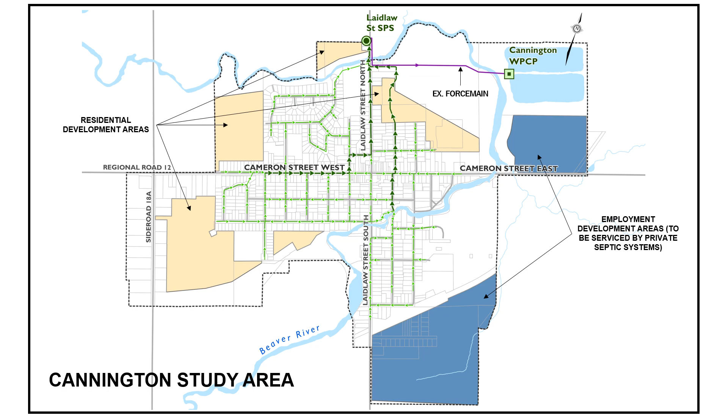Preliminary estimates for Cannington indicate that the service population within the existing urban boundaries could potentially reach approximately 5,400 by 2041, approximately 3 times the existing serviced population.

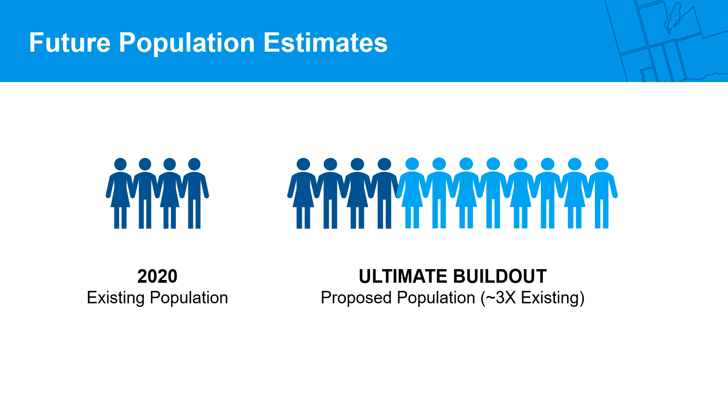Based on historical average day flows from 2018 to 2021, the Cannington Water Pollution Control Plant, or WPCP for short, is operating at capacity. It is standard practice for municipalities in Ontario to start planning for upgrades when a treatment plant reaches between 75 and 80% of its rated capacity and additional growth is projected.

To accommodate the projected growth in the community, a wastewater treatment capacity of 2,500 cubic meters per day would be required. Additional capacity is also required in the sanitary collection system to convey flows to the WPCP.

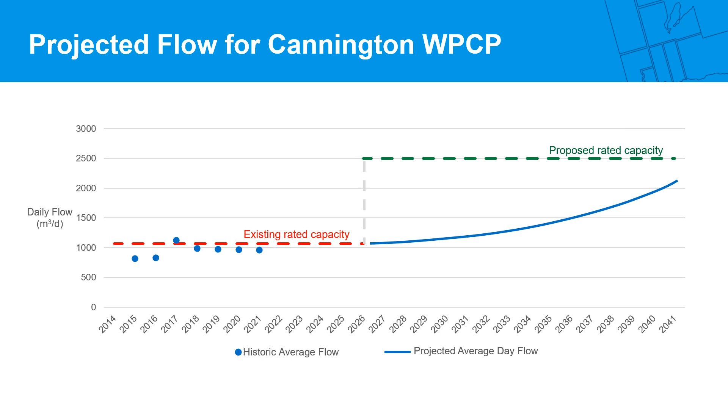Cannington is growing. Infrastructure improvements to the Cannington wastewater system are required to service growth in the community. For this study, we need to answer two questions: 1. How do we convey wastewater flows generated by new growth in the community? And 2. How do we treat those wastewater flows?

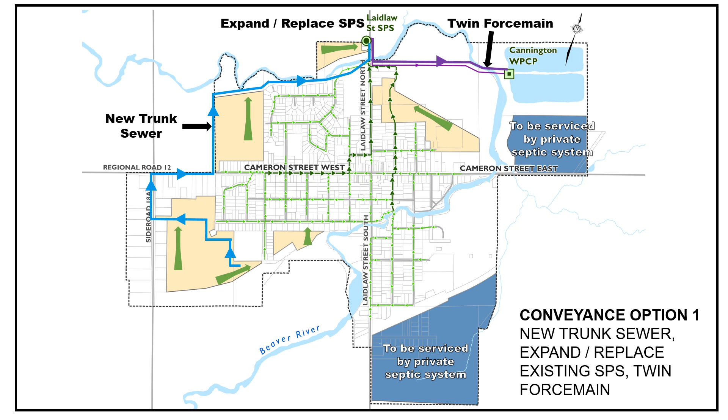So where do we begin? We have three different options to address the first question. The first conveyance option involves constructing a new trunk sewer to service new development to the west, expanding or replacing the existing Laidlaw Street sewage pumping station, abbreviated as SPS, and constructing a twin force main to the Cannington WPCP.

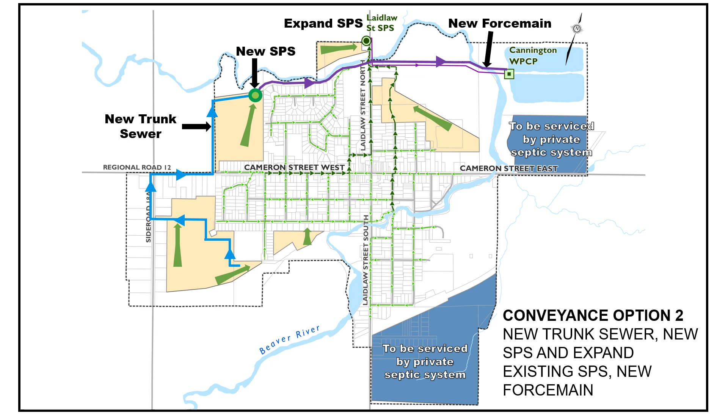The second conveyance option involves constructing a new trunk sewer to service new development to the west, expanding the existing Laidlaw Street SPS, constructing a new sewage pumping station to service new developments to the west, and constructing a new force main to the Cannington WPCP.

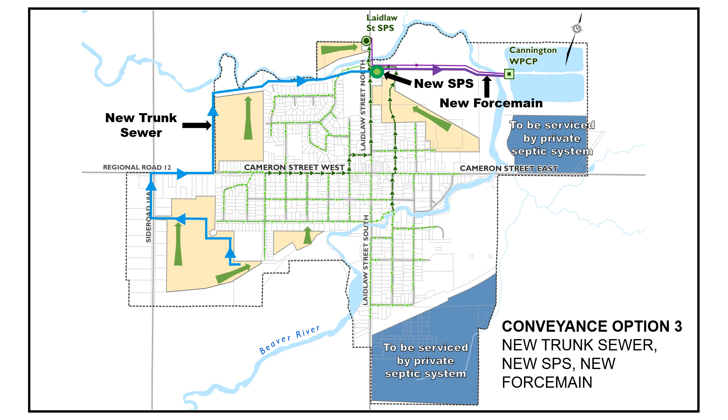The third conveyance option involves constructing a new trunk sewer to service new development to the west, constructing a new sewage pumping station and diverting flows from the existing and proposed development to it, and constructing a new force main to the Cannington WPCP and reusing the existing force main. The Laidlaw Street SPS could be maintained in service or eventually decommissioned.

There are still questions left to address. As part of the next steps for this study, we need to: 1. Evaluate the conveyance options to identify the preferred solution. 2. Identify the preferred site or sites for the pumping station or pumping stations and confirm the preferred alignment of sewers and force mains.

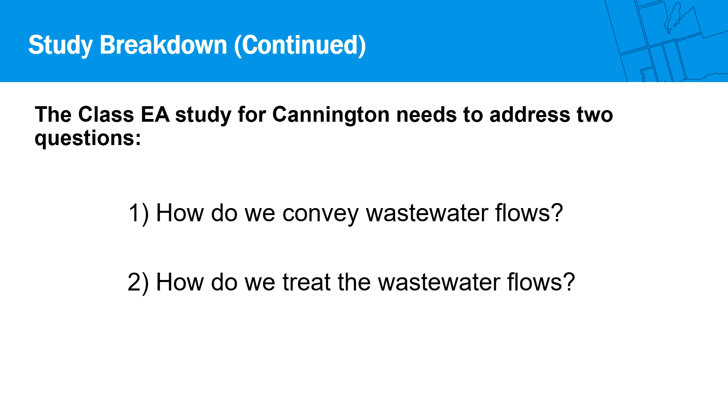To select the preferred treatment option, we need to consider a few criteria. 1. Does the option allow meeting the long-term capacity needs? 2. Does the option allow the treated discharge to consistently meet effluent quality objectives and discharge policies? 3. Does the option efficiently use existing infrastructure? 4. Is this option compatible with existing treatment processes and operational practices, such that implementation will not significantly impact existing operations? And 5. Can the servicing strategy be implemented without major disruption to current sanitary sewage servicing?

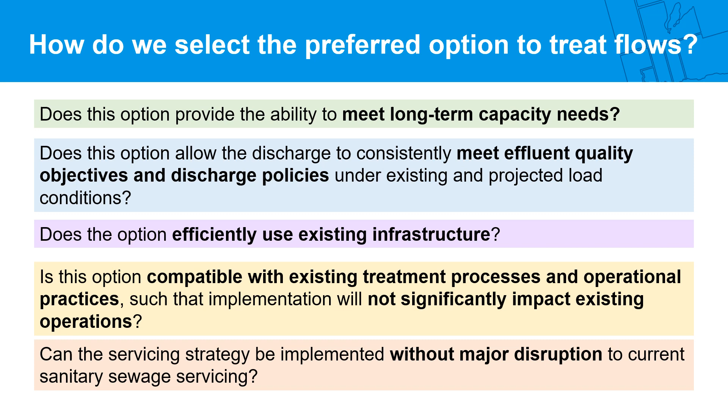If the answer to any of these questions is no, then the alternative is considered inadequate and is eliminated.

Treatment option 1 involves constructing a new treatment plant to operate concurrently with the existing Cannington WPCP. All new development would be directed to the new plant, while the existing development would continue to be directed to the existing plant. This option would meet long-term capacity needs. It would allow consistently meeting effluent quality objectives. It could be implemented without major disruption to the current sanitary sewage servicing. However, it does not efficiently use existing infrastructure and is not compatible with existing treatment processes and operational practices.

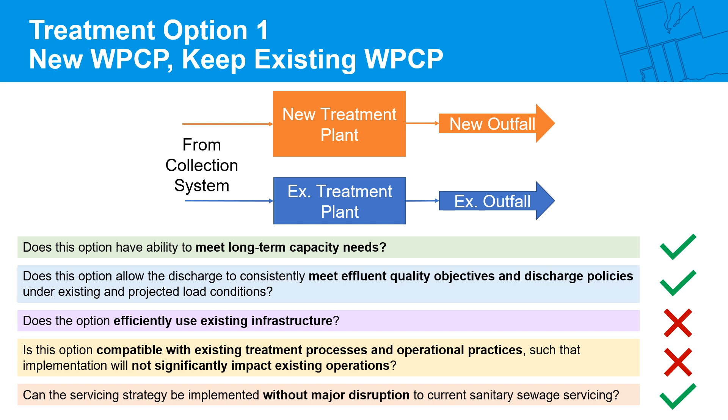Treatment option 2 involves constructing a new treatment plant and decommissioning the existing Cannington WPCP. This option meets long-term capacity needs. It allows meeting effluent quality objectives consistently and can be implemented without major disruption to the current sanitary sewage servicing. However, it does not efficiently use existing infrastructure and is not compatible with existing treatment processes and operational practices.

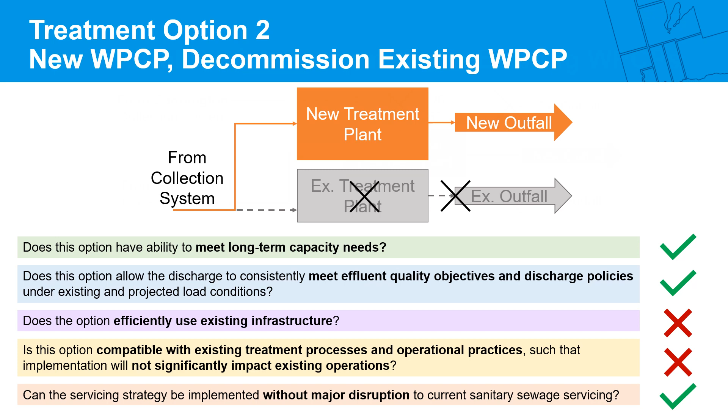Treatment option 3 involves decommissioning both the existing Cannington and Sunderland WPCPs and constructing a new central WPCP to treat wastewater from both communities. Like the previous options, this option meets long-term capacity needs. It allows the discharge to consistently meet effluent quality objectives and can be implemented without major disruption to the current sanitary sewage servicing. But it does not efficiently use existing infrastructure and it is not compatible with existing treatment processes and operational practices.

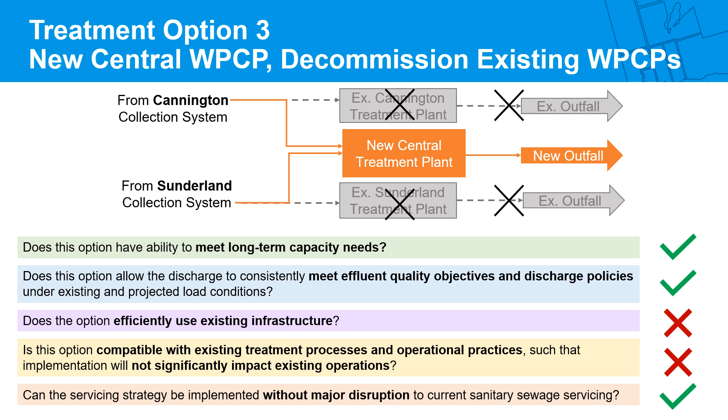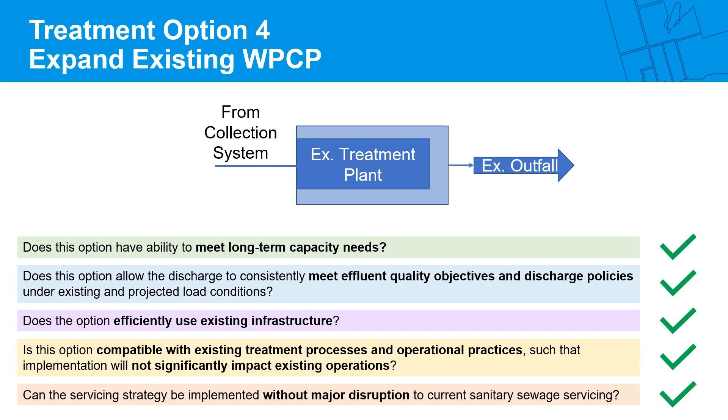Treatment Option 4 involves expanding the existing Cannington WPCP. This option meets long-term capacity needs, consistently meets effluent quality objectives, efficiently uses existing infrastructure and it is compatible with existing treatment processes and operational practices, and it can be implemented without major disruption to the current sanitary sewage servicing.

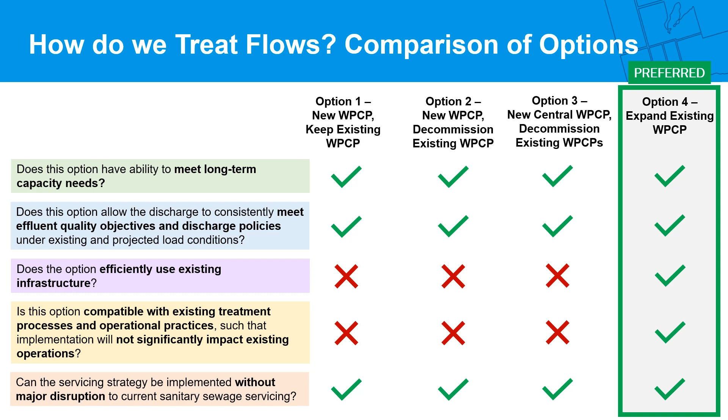In summary, we have 4 treatment options. Options 1, 2, and 3 do not meet 2 of our mandatory criteria. Option 4, expanding the existing Cannington WPCP, is the only one that meets all the criteria. Therefore, this is the preferred option.

There are still questions we need to answer, namely: what are the treatment objectives? What is the preferred approach or strategy to expand the WPCP? What is the preferred treatment technology? And what is the preferred design concept for the WPCP expansion? In the next few slides, we will discuss how we propose to tackle each of these questions.

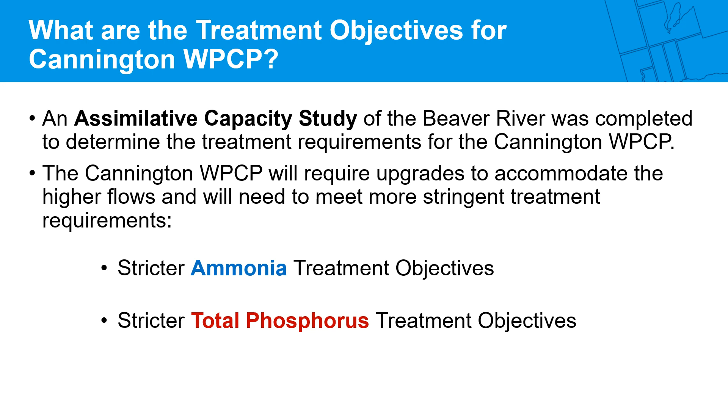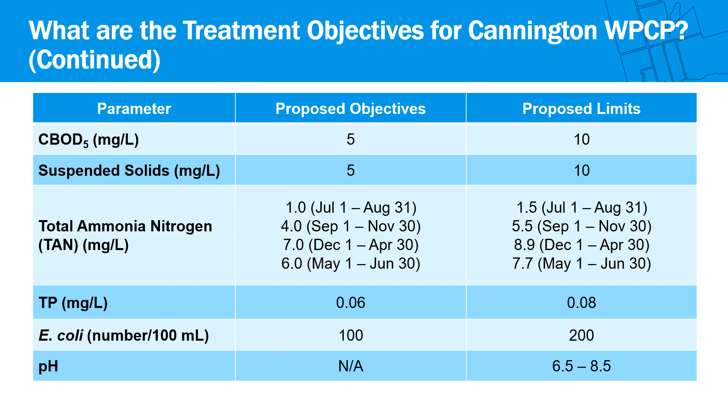What are the treatment objectives for Cannington WPCP expansion? To figure this out, the region completed an assimilative capacity study of the Beaver River, where treated effluent from the WPCP is discharged. To minimize impacts to the river, it was concluded that the Cannington WPCP expansion will need to meet more stringent treatment requirements for ammonia and for total phosphorus. This table shows the treatment objectives and limits proposed for the Cannington WPCP, proposed to minimize impacts to the water quality of the Beaver River.

What are the possible strategies for expanding the WPCP? We could add more facultative lagoons like the existing ones. Facultative lagoons rely on the natural activity of microorganisms to remove pollutants from the wastewater. We could build a new mechanical treatment plant, or we could add mechanical equipment to the existing lagoons. All these options would be designed to meet the treatment objectives, but each has advantages and disadvantages.

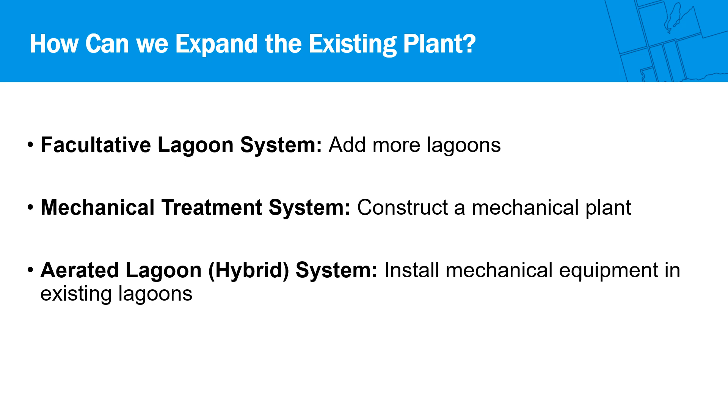Facultative lagoons use a natural, passive treatment process that is simple to operate but requires a large footprint. These lagoons are typically designed to discharge only twice a year, which means that the incoming flows must be stored for up to 6 months. Facultative lagoons are typically found in smaller rural communities.

Mechanical treatment plants use mechanical equipment such as air blowers, pumps and mixers to accelerate biological treatment processes to remove organic matter and solids from the wastewater. These processes require smaller footprint but are more operationally complex. These facilities are typically designed to discharge continuously, eliminating the need for large storage tanks or lagoons. Given their smaller footprint, these plants are used where there are site constraints.

Finally, an aerated lagoon system combines the benefits of a lagoon with those of a mechanical plant. Aerated lagoons do not require as much space as facultative lagoons as they use mechanical equipment to accelerate the rate of treatment. Thus, they are a good option to expand the capacity of existing lagoon plants without the need for new lagoons. Aerated lagoon systems can be found all across southern Ontario.

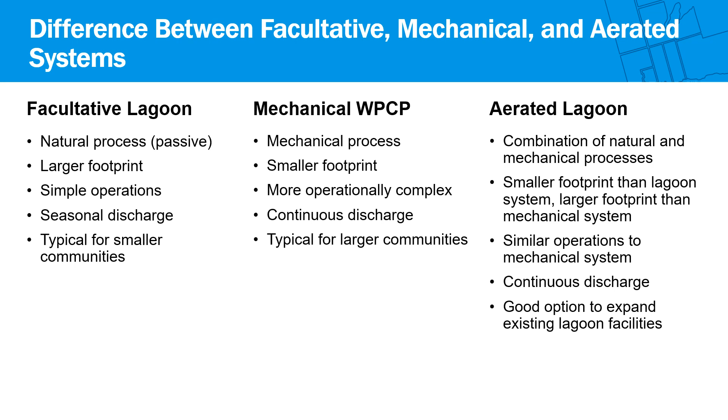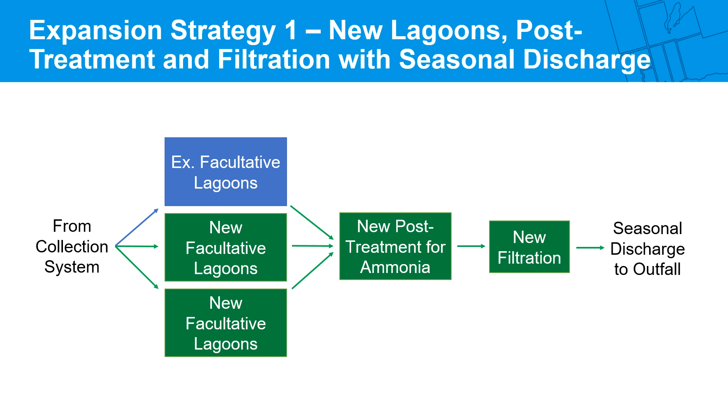Expansion Strategy 1 involves constructing 2 new lagoons next to the 2 existing ones and building new treatment systems for ammonia removal and filtration. The plant would continue to discharge to the Beaver River only in the spring and in the fall. To build the 2 new lagoons, the site boundaries would need to be extended as the site would require more than twice the existing footprint.

Expansion Strategy 2 also involves building new lagoons. However, some of the lagoons would be aerated to accelerate the treatment process. This would make the lagoons smaller and reduce the total land required for the plant. However, new facilities to remove ammonia and provide filtration would be also required.

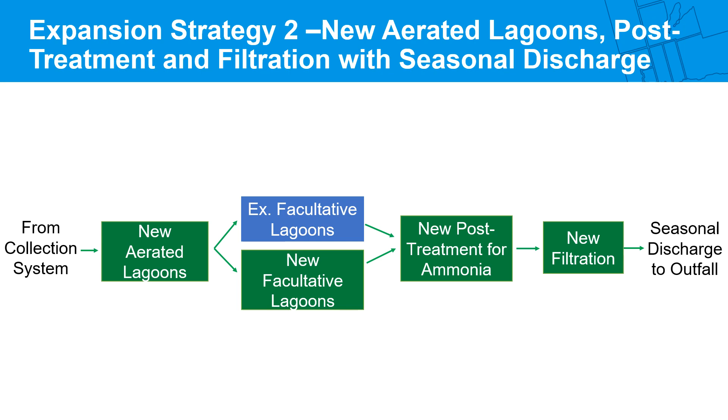Expansion Strategy 3 consists of decommissioning the existing lagoons and building a new mechanical WPCP. The new plant would be designed to allow continual discharging to the Beaver River. This strategy would result in a significantly smaller footprint, but this would increase the capital cost of the project.

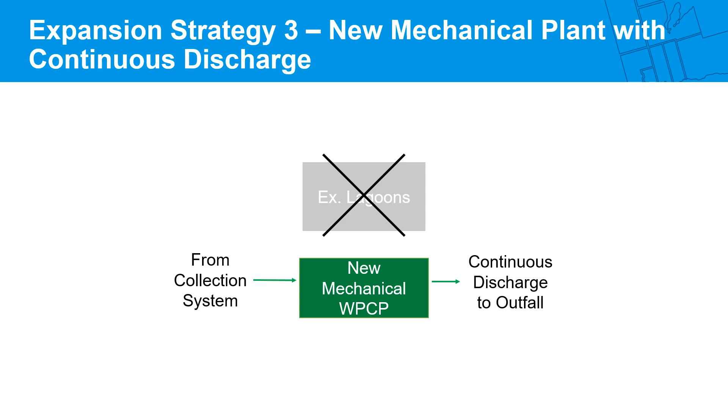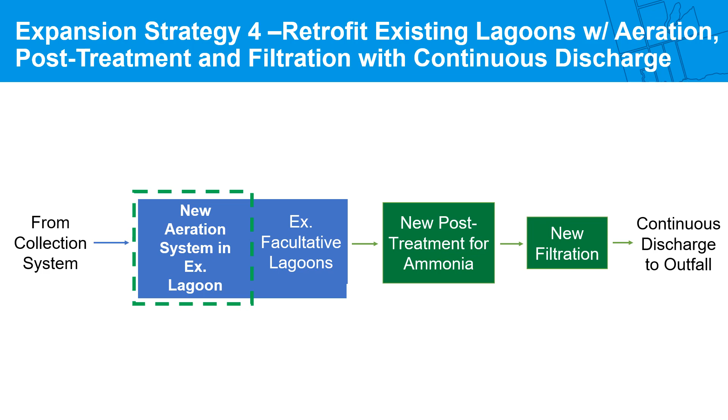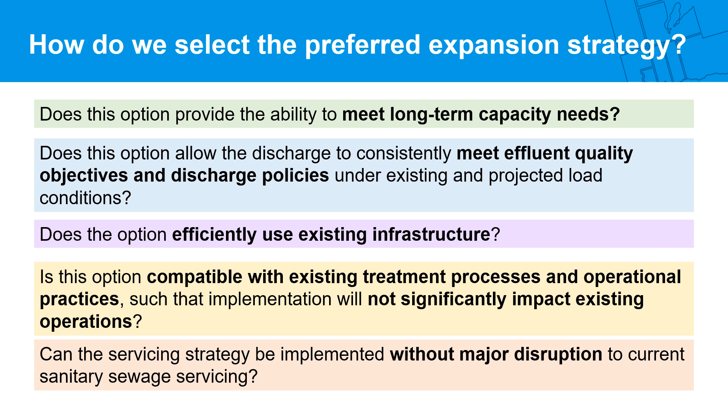To choose among the 4 strategies, we used the same criteria we previously considered. We want to select an option that meets the long-term capacity needs, meets effluent quality objectives, efficiently uses existing infrastructure, is compatible with existing processes and can be implemented without significant impact to existing operations or disruptions to existing services.

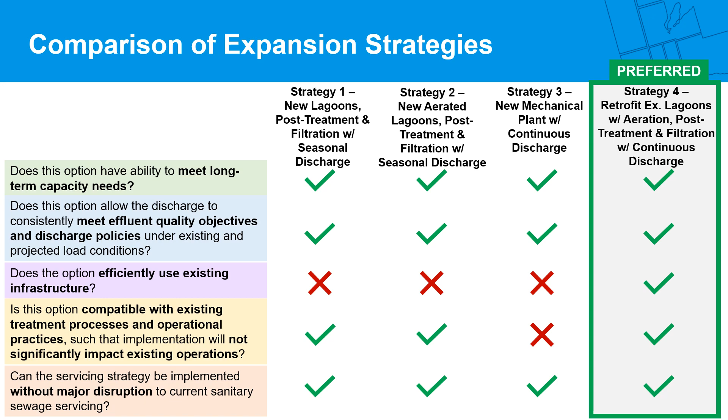This chart provides an overview of the evaluation completed for the 4 different expansion strategy options. Since Expansion Strategy 4 is the only one that meets all the criteria, it was selected as preferred.

To summarize, the preferred option to treat wastewater flows from the community is to expand the existing Cannington WPCP. The preferred strategy to achieve this is to retrofit the existing lagoons with an aeration system and add new treatment processes for ammonia removal and filtration.

This strategy would provide the required capacity to treat future flows while meeting all water quality requirements, efficiently using existing infrastructure and minimizing operation disruptions while reducing land acquisition requirements and capital costs.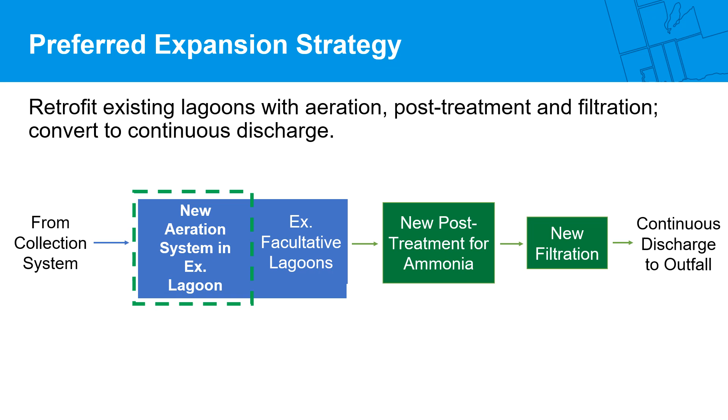But there are still questions left to answer. For example, there are several available technologies to remove ammonia and to provide filtration. Each technology has its advantages and disadvantages and has an impact on how much land is needed for the plant, how much construction will cost, and how much the plant will cost to operate in the future.

In the next stages of this study, we will evaluate each of these technologies in detail and will consider not only their cost and technical features but also their impacts on the social, cultural, and natural environments.

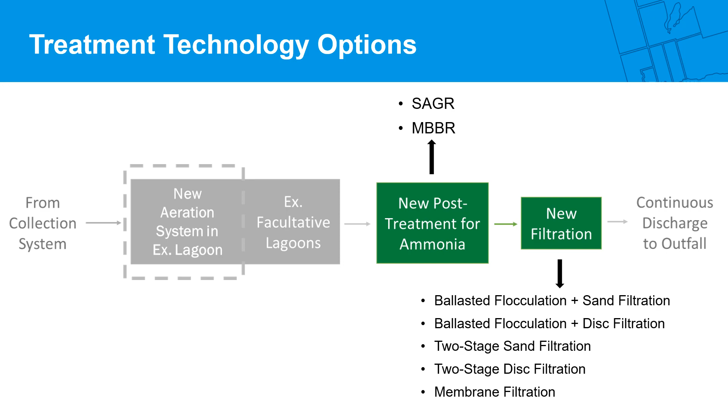Next, we will show you 4 possible design concepts for the preferred expansion to the Cannington WPCP. The concepts show properties that would need to be purchased by the region to construct the plant expansion.

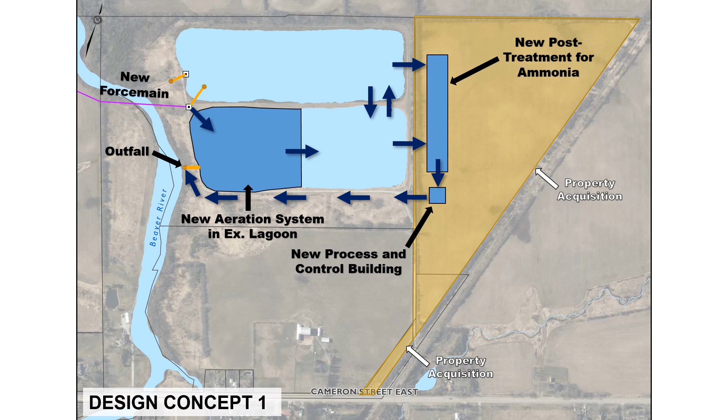The first design concept would require the region to purchase property to the east and south of the plant site. The areas requiring property acquisition are shown in yellow. The new land would be required for the new process facilities and to facilitate access to the site.

The second design concept also requires purchasing the triangular property to the east as well as land to the north to accommodate a new road access via Brock Concession Road 13.

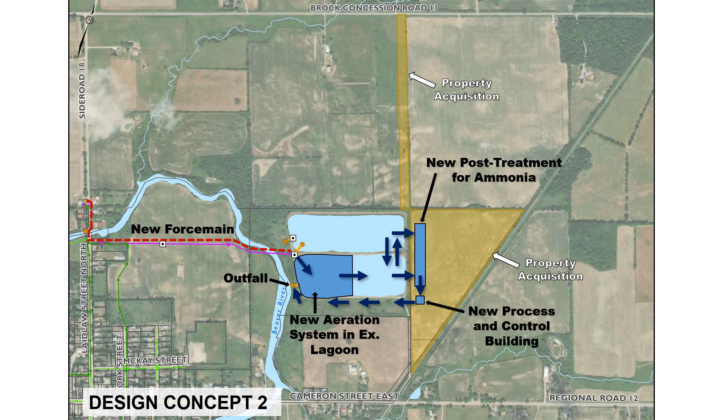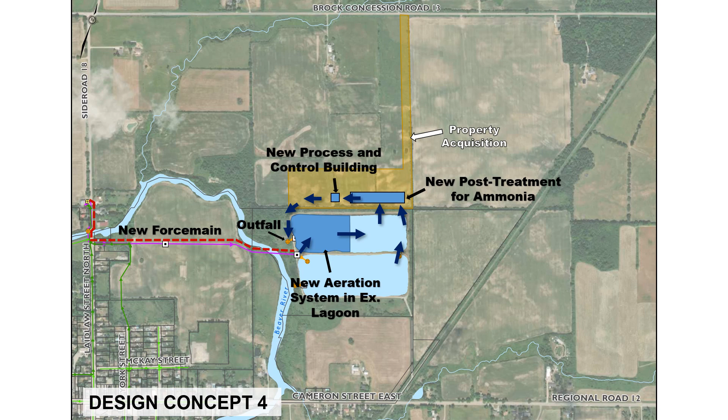There is still work to be done, as we need to conduct a detailed evaluation of each concept. To support the evaluation, the project team will use the Envision framework from the Institute for Sustainable Infrastructure. The Envision framework is becoming a standard to demonstrate environmental stewardship for public infrastructure. The framework will be used to evaluate how the project contributes to social, economic, and environmental sustainability.

Before we make any big decisions, we need to hear from you, the residents and business owners of Cannington. We want to know your concerns and preferences so that we can take them into account when evaluating options.